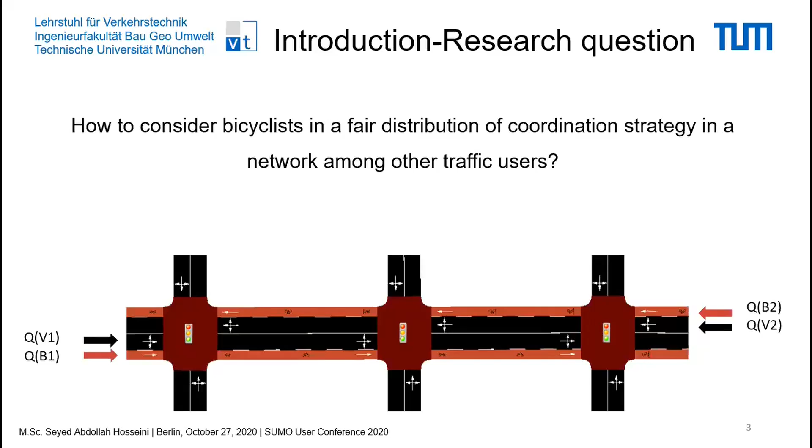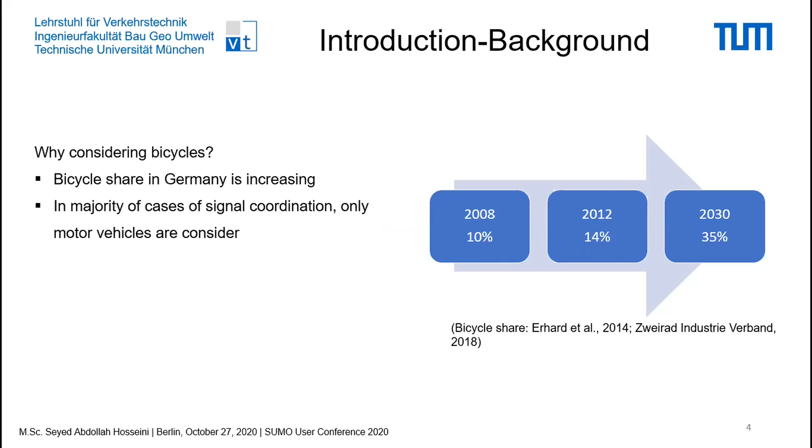To do so, firstly, we want to say why should we consider bicycles at all? Besides the benefits that we know of cycling as a sport activity, that it reduces cardiovascular diseases, what is very important for us is also that the bicycle share in Germany is increasing, and we should also consider that. So in 2008, we had nearly 10% of mode share by bicycle in Germany, and in 2012, it has increased to nearly 14%. And it's predicted by some researchers and some growth rate forecasts that in 2030, the bicycle share would increase to nearly 35% in Germany. On the other hand, we saw that in the majority of cases of signal coordination, only motor vehicles are considered.

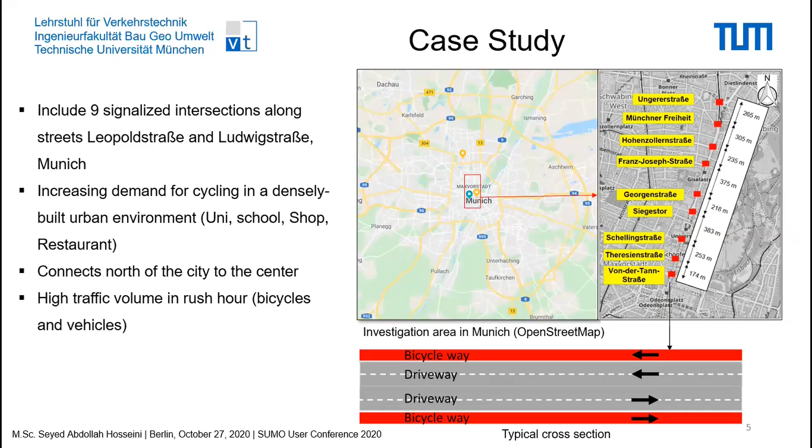So then we go to the case study and the place we have conducted our study. So it's exactly situated in the center of Munich and includes nearly 9 signalized intersections along the Leopoldstraße and Ludwigstraße. This area has shown an increasing demand for bicycles because it's situated in a densely built environment with numbers of universities, schools, shops, and restaurants. This area also connects the north of the city to the center. And we saw highly varying traffic volumes for both bicycles and motor vehicles. So the typical cross-section is also shown in the bottom, that the bicycle way is completely separated from the motorway.

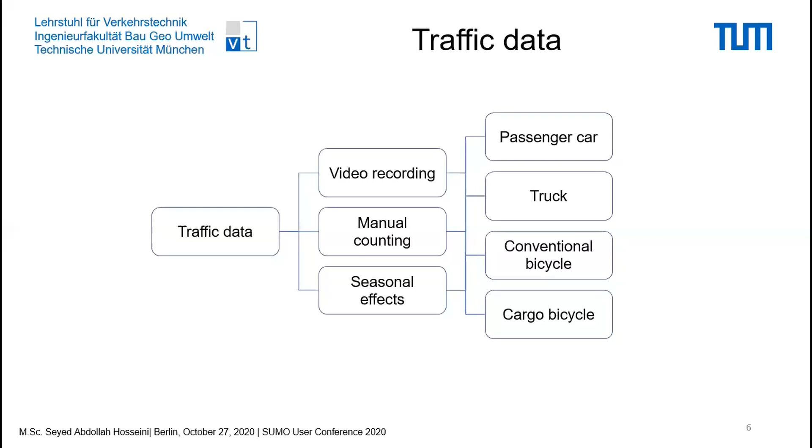The traffic data was the basis for this study. We could install some cameras at some intersections to gather the data, and in some intersections where that was not possible, we counted manually. We also considered the seasonal effects of our study. Therefore, we did our traffic survey in the summer to include the highest number of bicycles in our traffic survey. From this video recording and manual counting, we counted passenger cars and trucks for motor vehicles and 2 types of bicycles, conventional bicycles and cargo bicycles, for our study.

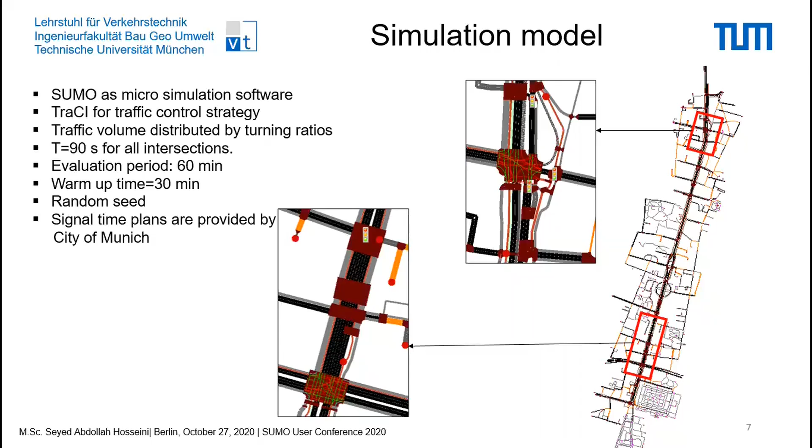Then we started building our simulation model. To do so, we have used SUMO as micro simulation software. So to the right, you see the whole stretch. We also used TraCI for traffic control strategy and controlling the controller, especially by the new algorithm. The traffic volume is statically distributed into the network by considering the turning ratios, and the cycle time of 90 seconds is implemented for all signalized intersections, as in current state. We have considered an evaluation period of 60 minutes and a warm-up time of 30 minutes by random seed. The information for signal time plans is also provided by the city of Munich.

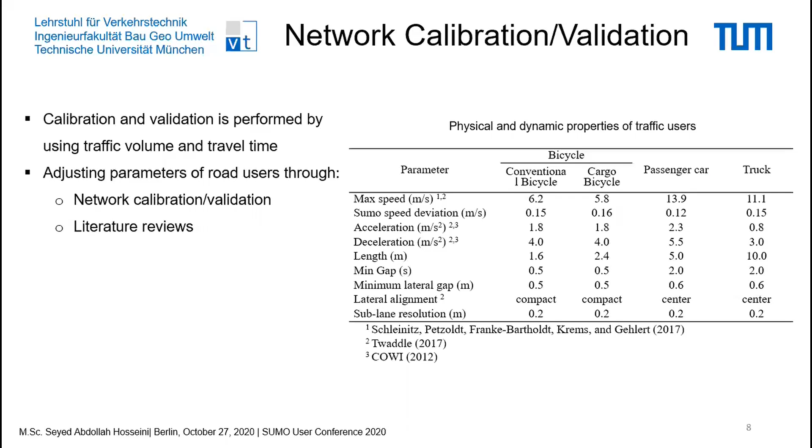And a brief introduction to signal coordination. I'm also interested to do that. All of you know that signal coordination, if it's possible, will increase the average speed of traffic users and increase the quality of traffic flow. At the same time, it also reduces delay and number of stops of traffic users.

But here in this study, we had some other challenges too. So we wanted to include different types of traffic users. It means the motor vehicles and bicycles at the same time. These traffic users have different physical and dynamic properties, meaning different speed, different acceleration, and different deceleration. In this case, how can we have a fair, or better to say, a weighted distribution of coordination for the network?

To answer that, our signal coordination methodology should at least have 3 steps. It should consider the major traffic streams. It should distinguish the different types of road users, namely bicycles and motor vehicles. And it should also consider different weighting factors for different types of road users.

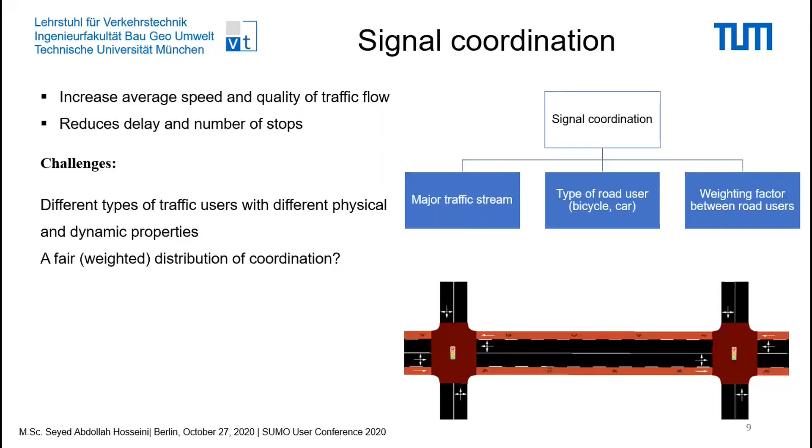This term means the length in seconds by multiple number of cycle time. This is what we have defined for this algorithm. And at the end, the evaluation of measures of effectiveness in interval length is also aggregated. So if I want to have an example to simplify the meaning, if we, for example, take n equals 5,

in this case, the interval length will equal 5 multiplied by 90, or 450 seconds. So at an interval length of 450 seconds, if the delay of bicycles during this interval length is higher than the delay of motor vehicles, then the controller switches to the offsets required for bicycle coordination.

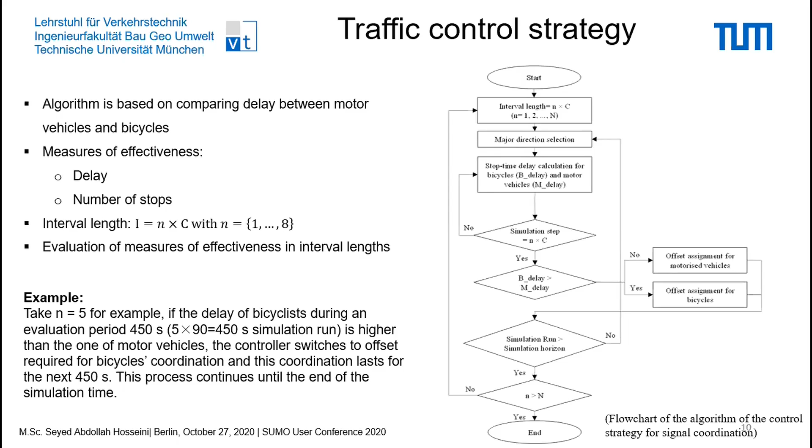If not, it switches to the offsets required for motor vehicles. And this coordination lasts for the next 450 seconds. And this process repeats itself until the end of simulation time. We got through this algorithm some results for delay and number of stops.

Firstly, the delay. On the left side, you see the average delay for bicycles with different interval lengths. We have defined interval lengths from 90 to 720, and you see also the results of the current state. For the delay of bicycles, we saw that the maximum delay happens at the current state, and the minimum delay of the new controller happens at the interval length 630 seconds.

On the other hand, for motor vehicles, we saw that the minimum delay happened at the current state, and the minimum delay of the new controller happened at interval length 450 seconds. So for bicycles, we saw a minimum of 28% of delay compared to the current state. However, we saw a nearly 27% minimum delay for motor vehicles compared to the current state.

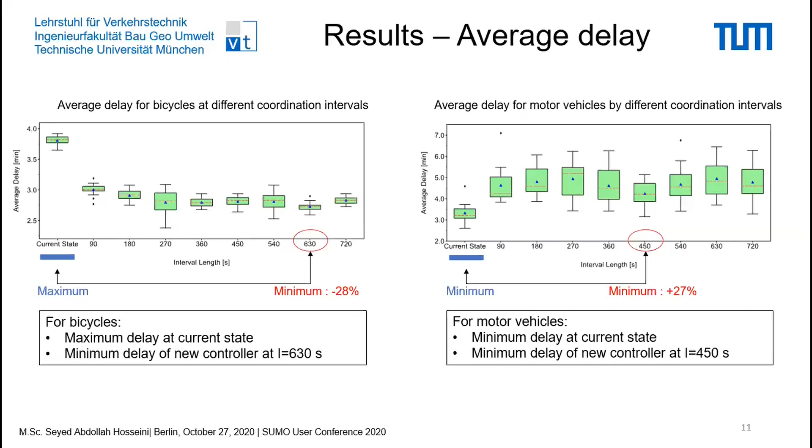Now here we come to the results of average number of stops. In these results, we saw that similar trends also happen. So for bicycles, the maximum number of stops happens at the current state, and the minimum number of stops of the new controller happens at exactly 630 seconds. For motor vehicles, the minimum number of stops happens at the current state, and the minimum number of stops of the new controller happened at interval length 450 seconds.

What is interesting here is shown by the bike travel time and vehicle travel time in the graphs. We also noticed that the interval lengths with the minimum for bicycles and motor vehicles happened within the travel time of bicycles and motor vehicles. So 450 seconds for motor vehicles happened during the vehicle travel time, and the interval length of 630 seconds happened during the bike travel time.

But why does the current state have the maximum in delay and number of stops for bicycles, while it has the minimum for motor vehicles? Because the current state is designed to be more responsive to motor vehicles, and the coordination of bicycles in the current state was not a priority of the network planning.

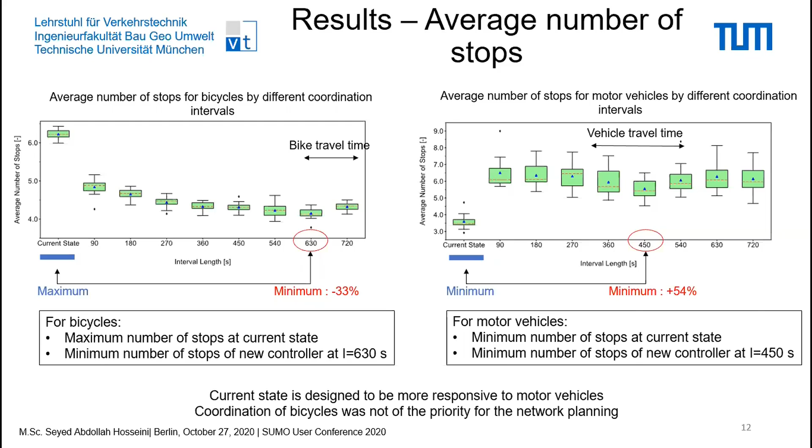So to summarize the results, we saw that the new controller strategy could decrease the delay and number of stops for bicycles. These changes were significant. On the other hand, the new controller strategy increased the delay and number of stops for motor vehicles. Therefore, the results are worsening, and this worsening is also significant. So the results are better for bicycles and worse for motor vehicles, but still we cannot decide what to do. So what is the measure to decide?

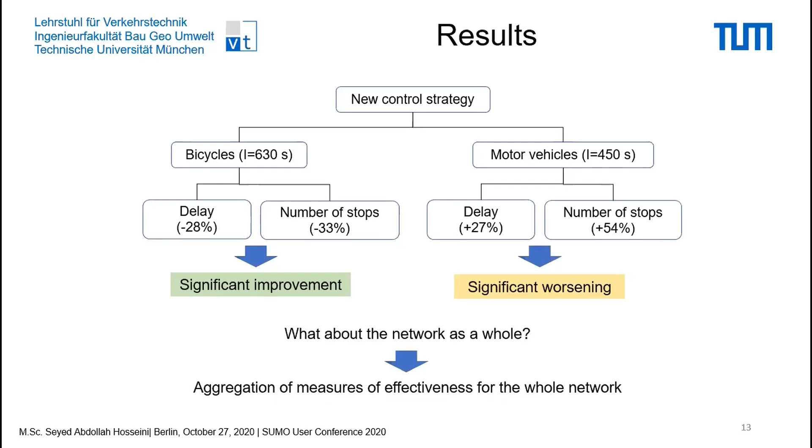To do so, we also consider the aggregated delay and number of stops for the whole network to make the decision a bit easier. So here you see the results of the network performance. On the left side, you see the cumulative delay for both bicycles and motor vehicles. On the right side, you see the cumulative number of stops for both bicycles and motor vehicles.

Interestingly, we saw that in both graphs we have a minimum, and this minimum happens at an interval length of 450 seconds. For the network delay, we have minus 1.62%. For number of stops, we have minus 0.04%. These minimums, however, are not statistically significant. That means that the delay and number of stops of the whole network are similar to the current state.

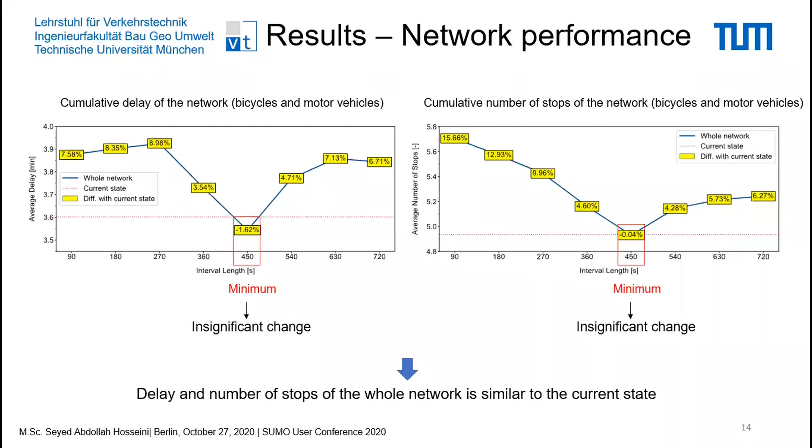So by this result, we go back to the previous result we got at an interval length of 450 seconds. We saw that for bicycles, we had nearly 26% reduction of delay and 30% reduction of number of stops. At the same time, we saw an increase of delay of 27% for motor vehicles, and an increase of number of stops of nearly 54% for motor vehicles.

And as we saw that the results of the current state are similar to the results of the minimum at interval length 450 seconds, we could say that coordination at an interval length of 450 seconds could fairly change the performance of the network control in favor of bicycles, while at the same time keeping the average cumulative delay and number of stops of the network similar to the current state.

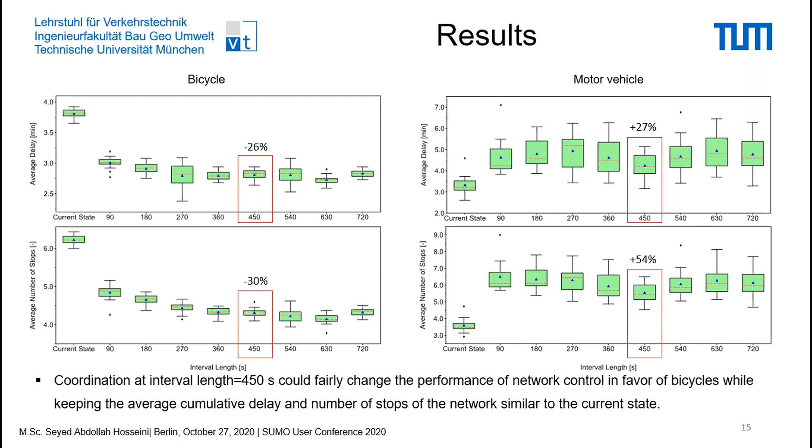And then we come to our conclusions. The study procedure here follows a model predictive structure, which was based on stop time delay. The goal of our study was to find the optimal coordination interval in which the delay and number of stops of the network are minimized. We could see also that the average travel time between the first and the last intersection in the network could play a key role to determine the optimum coordination interval of relevant traffic users.

This approach could also show a solution to find a fair delay-based coordination between different traffic users. This study, however, was implemented in an offline base. And if we could access the data online, it's also possible to implement a live application of this procedure. And in the future, we're also interested in extending this methodology by considering queue blocking effects for different traffic users and varying traffic volumes.